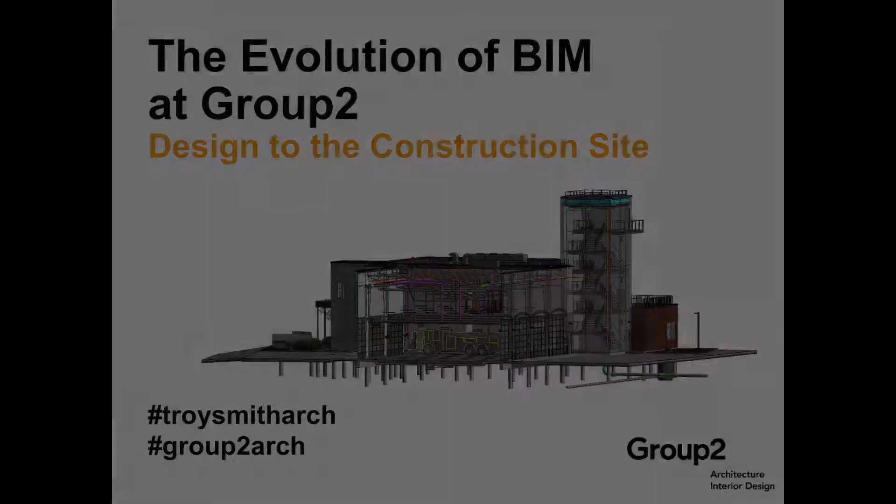So we've evolved like Rory and Grant. We've evolved the title of the presentation a little bit over the last couple of weeks.

So just so everybody understands, Group 2 has offices in Edmonton, Red Deer, and Calgary. As was noted, I was a member of the firm up until 2010, moved back to Saskatchewan to start the Saskatoon studio and became principal in Group 2. We've been in Saskatchewan since 2010, so 7 years. We've evolved the studio from myself and my wife, Laura, up to 10 people now in Saskatoon. I'm going to talk about the evolution of BIM in our office from design to the construction site, because we've found a lot of the power of BIM is not only from the design side, but the integration to construction. The three projects I'll talk about are actually from Alberta, none from Saskatchewan, but they give us a place where we can go, I think, as a province.

So, I mean, we've all been hearing about BIM for many, many years. And when our firm started down the BIM road, we had lots of questions: was this the silver bullet? Was this going to achieve all of the great things we thought it was going to do? How are we going to get there?

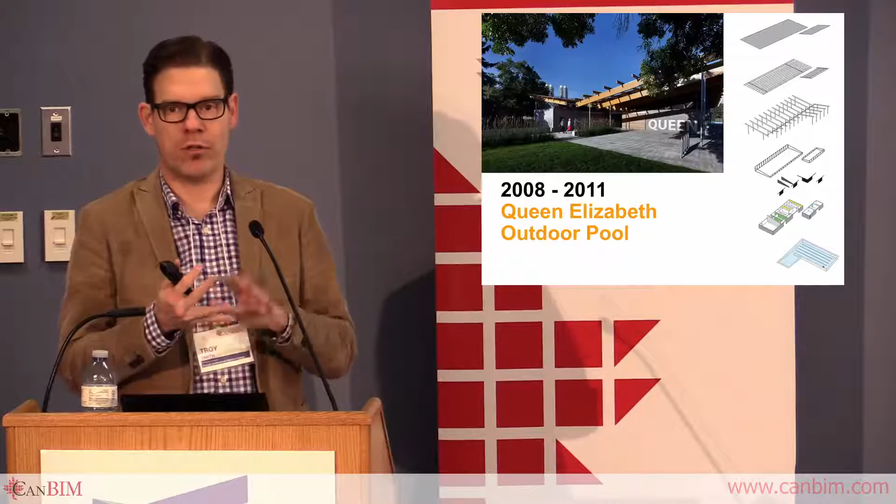So Queen Elizabeth Pool was the first project. Started in 2008, completed in 2011. We thought it was a good project because it wasn't very big, a $1 million construction budget. It's also a seasonal building, so really the major parts of the building are architectural, structural, and electrical. There's no mechanical really in the building besides plumbing. So we thought, well, it's a good place to start to get the ball down the field a little bit.

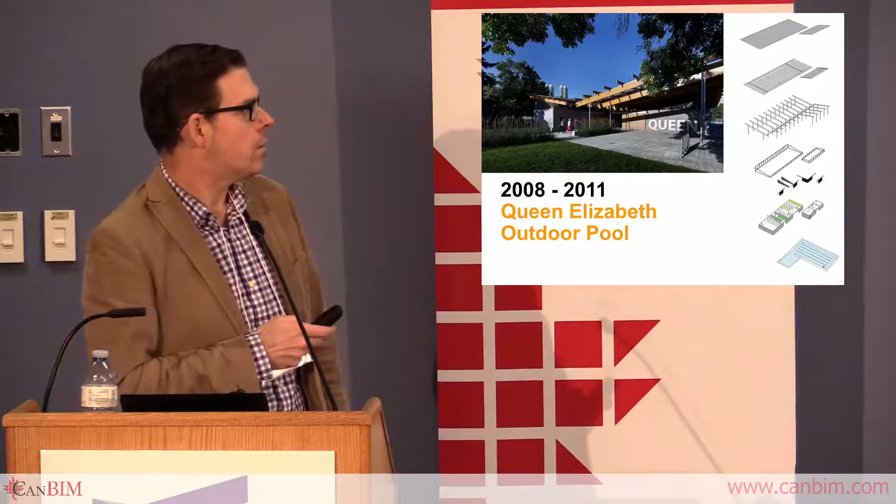So here's a shot of the BIM model. At the time, we as a firm had structural and architectural together - we don't anymore, but at the time we thought, again, super easy. We get architects and structural engineers working together in the same model, no problem. Pretty easy to kind of get the ball down the field.

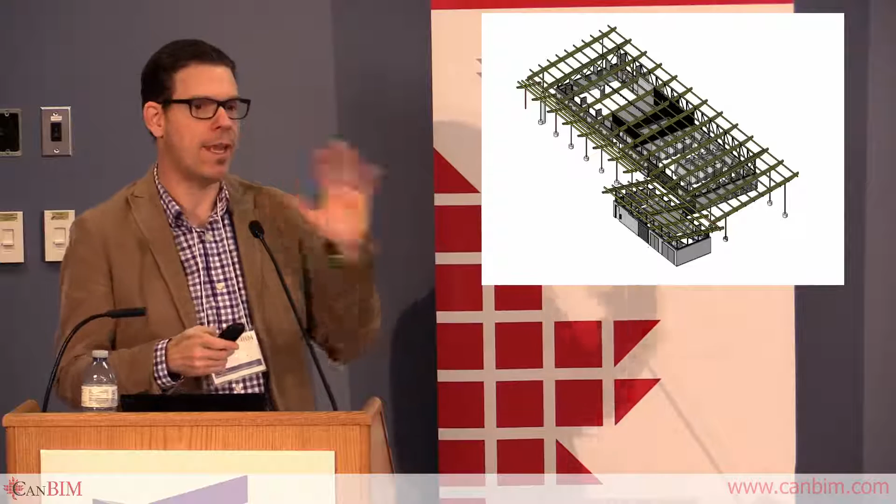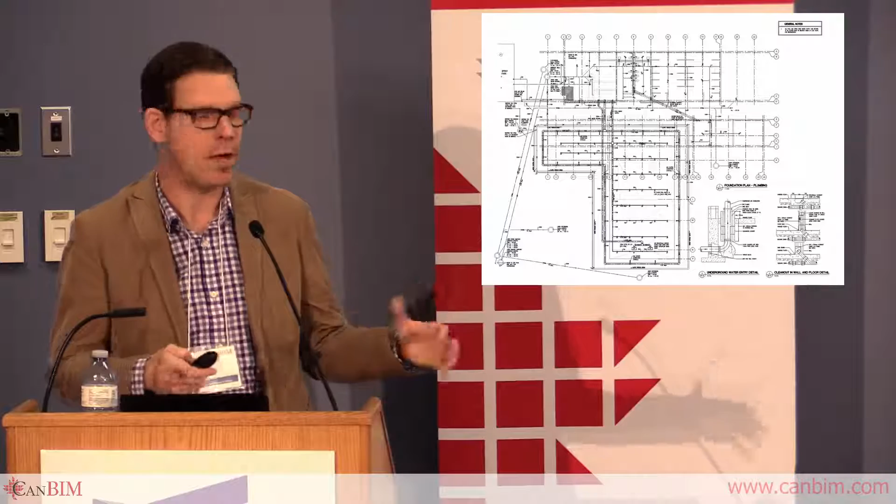But the difficulty we had is that our mechanical engineer, when it came to the pool, the kind of L-shaped thing on the bottom, none of that is drawn three-dimensionally. Everything is drawn two-dimensionally. So we had to try and coordinate all of the three-dimensional objects that we had with the two-dimensional objects that they created for the pool. So that whole piece, the efficiencies that we see now using Revit, wasn't really there. It wasn't really there because we started as a test case, so how we could use Revit.

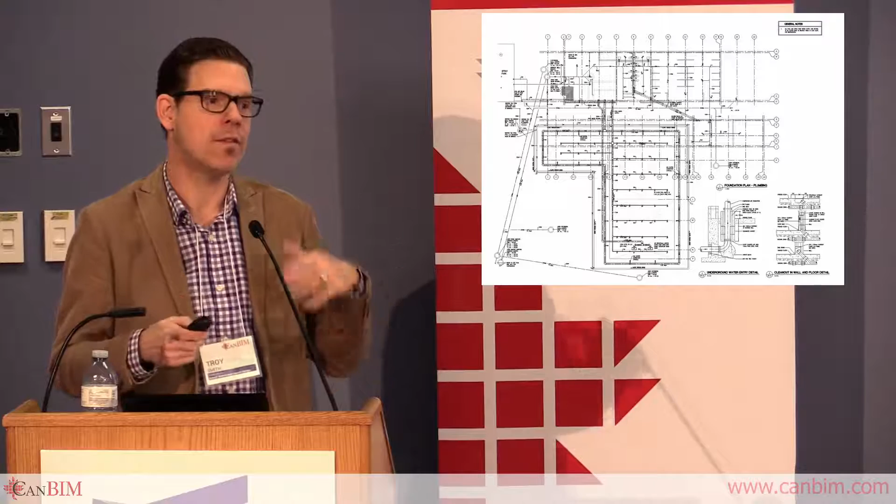So I'm going to talk on the three projects about sort of lessons we learned using Revit and where we have evolved things over the years. So as I said, the first part was this 2D and 3D coordination piece. More and more, we are trying to do everything in Revit and doing it three-dimensionally, even trying to get our landscape architects to do things three-dimensionally, which is really, really hard. They don't like to draw things three-dimensionally, generally speaking.

So as much as we can do that, we coordinate those pieces together to really make them work. All building consultants using Revit - we've now mandated as a firm on, I would say, 90% of our jobs, we don't allow our consultants to use AutoCAD because the efficiencies are just not there. This was the first project where we really understood that's required. The other thing is the architectural site plan. For the longest time, we've been drawing site plans in AutoCAD and then merging them together with the Revit world. In the Saskatoon studio, we've now stopped drawing all site plans in AutoCAD. Everything's done in Revit, so we can coordinate those things much, much better.

So what happened there? Oh, there's a slide missing. Okay, sorry, the next project is the Meadows Community Recreation Centre in Edmonton. We started it in 2010, it was built in 2014 by PCL. Very, very large team - we had consultants from Edmonton, Red Deer, Saskatoon, Toronto, Calgary, and Wisconsin on the job.

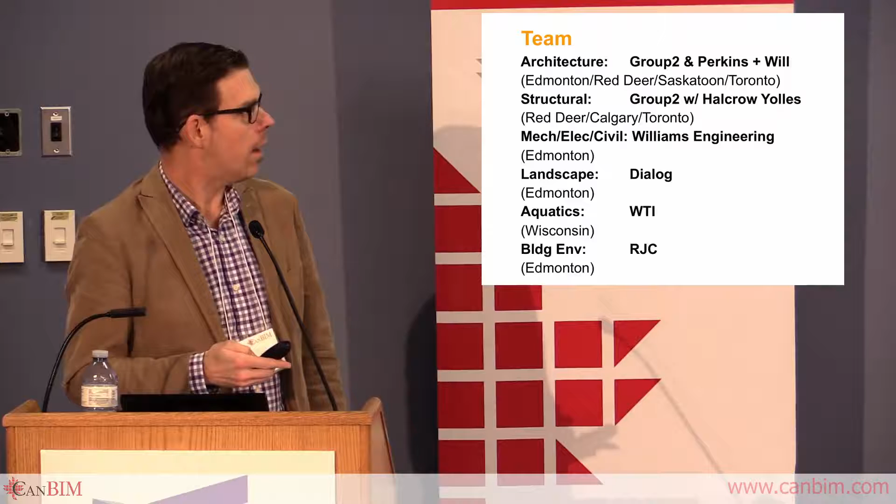So we tried to figure out the best way to break up the model to make it efficient. What we ended up doing was an integrated model between Group 2 Architectural, Group 2 Structural, and Williams Engineering, our M&E consultants. Then we had federated models, linked-in models for Perkins & Will, another architectural firm, our pool consultant, and Halcrow Yolles, the structural consultants. So we essentially had 4 models coming together, with one model that was really, really big because it had M&E, structural, and architectural in it.

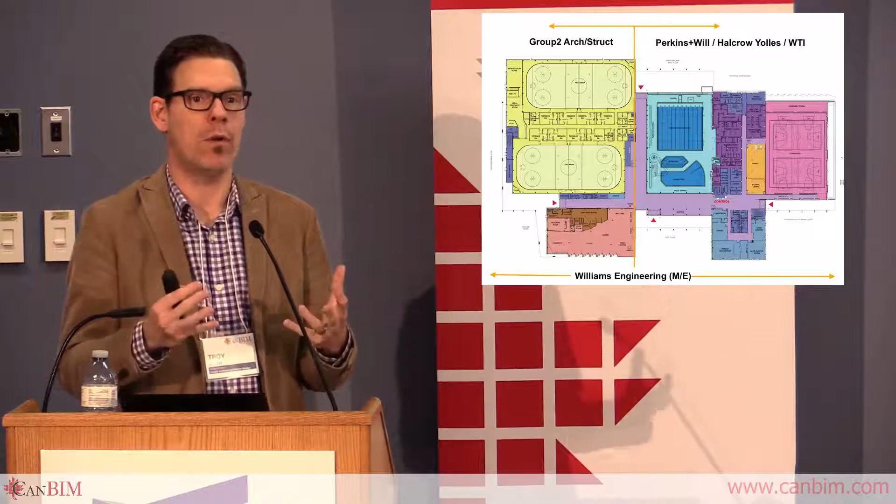So just trying to get, we actually had to develop a schedule so that people could actually, when they would save and sync the model, they couldn't do it at the same time because they would crash the model. This is back before cloud was being done. We had a Riverbed appliance to compress the information going back and forth between different consultants to make it work, but we still had to create an actual saving schedule so that we could make it all work. So there was a lesson learned right there.

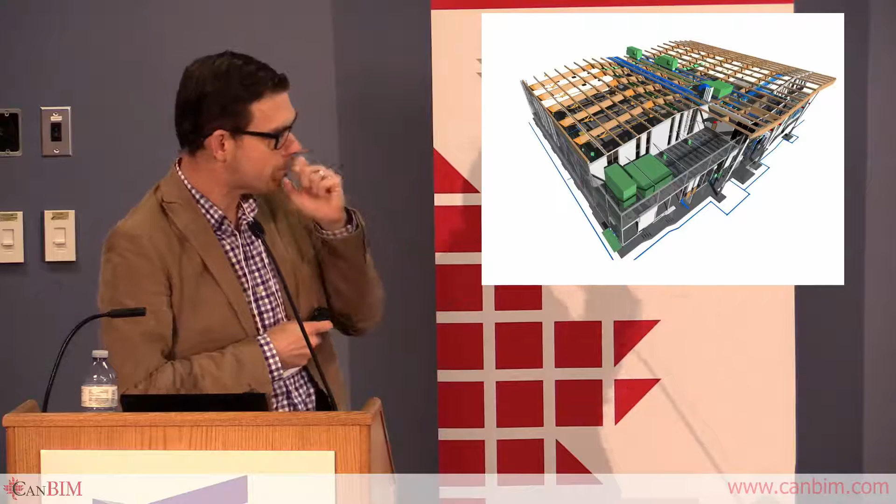The other thing, as has been noted several times before, the biggest piece we've seen is the coordination of all the elements. This is a shot from Navisworks, our Navisworks model. All of the green is mechanical pieces, rooftop units, those sorts of things. That was where we found the power, especially because this building has really no ceilings. Everything is exposed - lots of exposed piping, exposed ductwork, all those sorts of things. So if you're going to build that, you need to coordinate it.

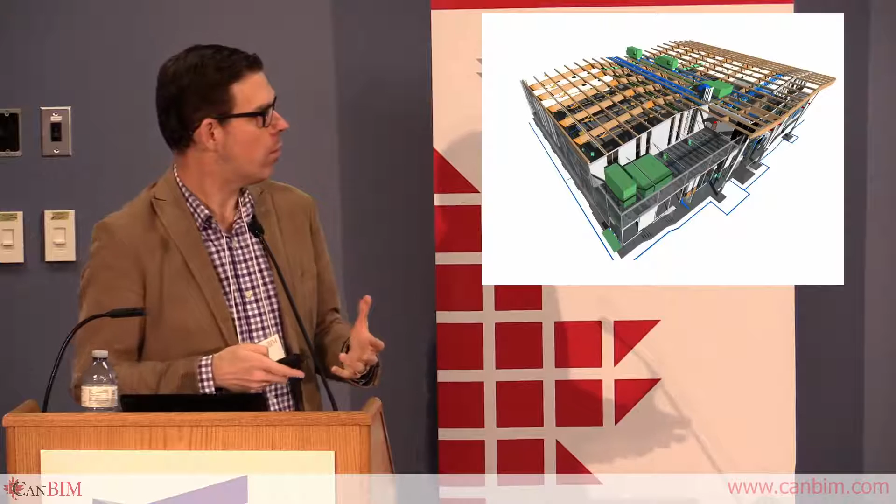So we spent a lot of time marking up things where we had to move the piping, relocate piping so it would go under beams and under ductwork, because none of it's hidden by the ceiling - all of it's exposed. It's got to be done right.

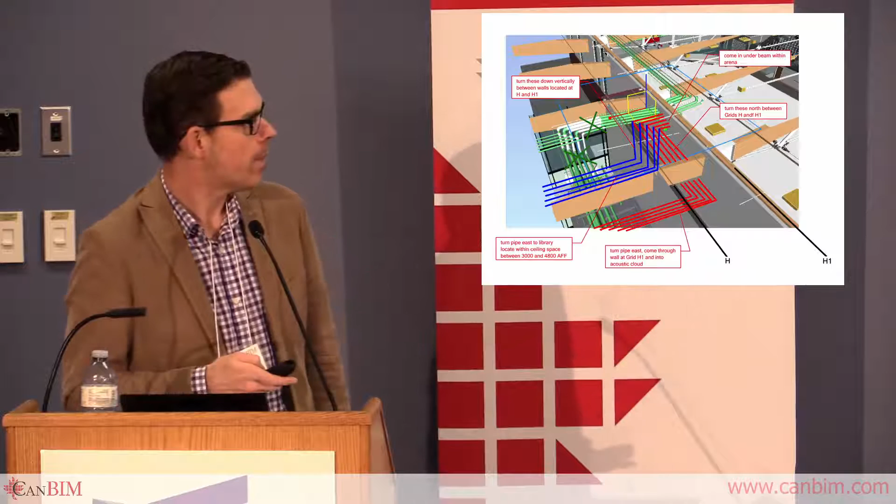We also spent a minimal amount of time - this was our first job where we actually did true clash detection. We did it, I would say, sort of near the end of the job, which was probably, again, lesson learned, not the right time to do it. It was a bit of a test case on doing true clash detection. It gave us a bit of a starting point. Did it fully pay out for us at the time? No, but what it did help us learn was that we needed to do it earlier on in the process to create true clash detection going forward.

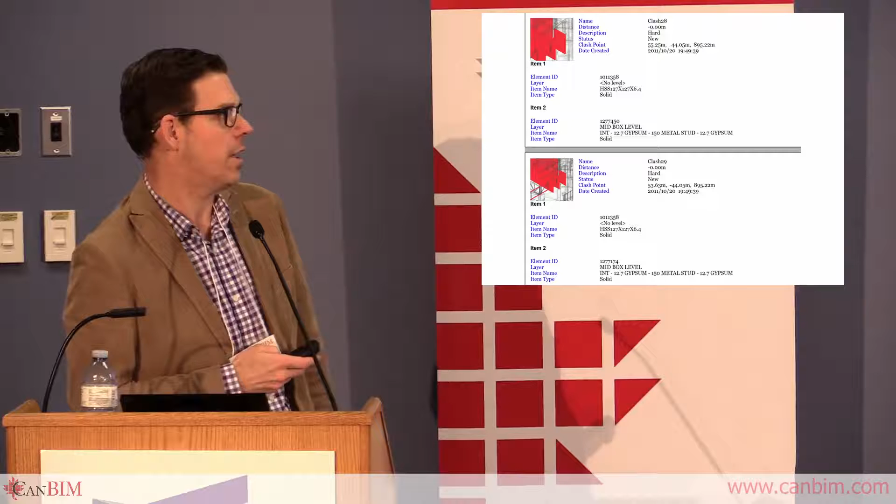So as I said, lessons learned: integrated model, size and speed. The other thing we had, our BIM execution plan, was very simple. We constantly were getting the consultants to make sure they were executing the project as described in the BIM execution plan. Because it was one of the first times a lot of them had done BIM on this scale, they were having a little bit of trouble knowing when they had to have certain things in the model, when they didn't - at a 50% working drawing stage, what needs to be in at this point and what needs to come later. So we spent a lot of time working with them to understand what needs to go in at that point.

Again, clash detection was a big one. The other one was that we provided the Navisworks model to PCL, the general contractor, to try and help with visualization of the project. But what ended up happening was, good or bad, PCL started using that model more to help them understand things. Then all of a sudden, a whole bunch of questions started coming from the model. But the model was never intended as a model that could be truly used for construction.

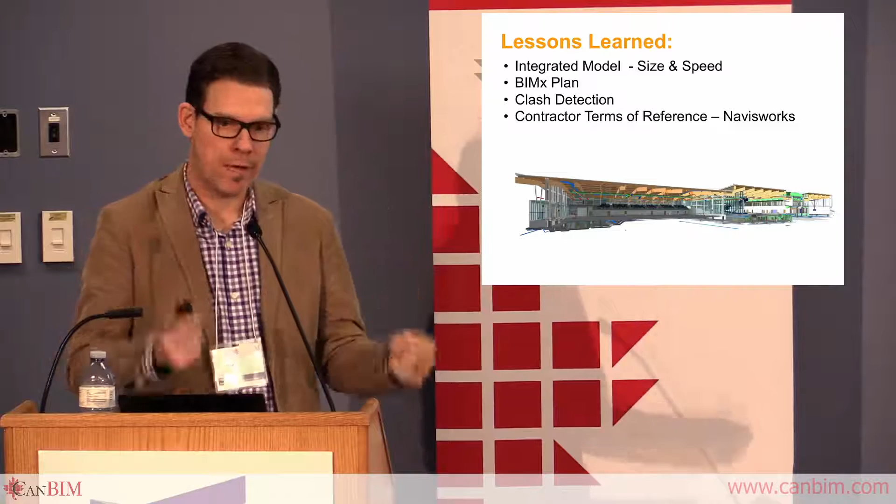At the end of the day, this was an export to 2D drawings to provide a set of tender documents where you could tender the project and build the project from. So that's another piece that we learned a lot about. We have to make sure we're very clear with our terms of reference when we're handing over models to the general contractor, so that it's very clear what that model's intent is, so that we don't get questions coming about it later.

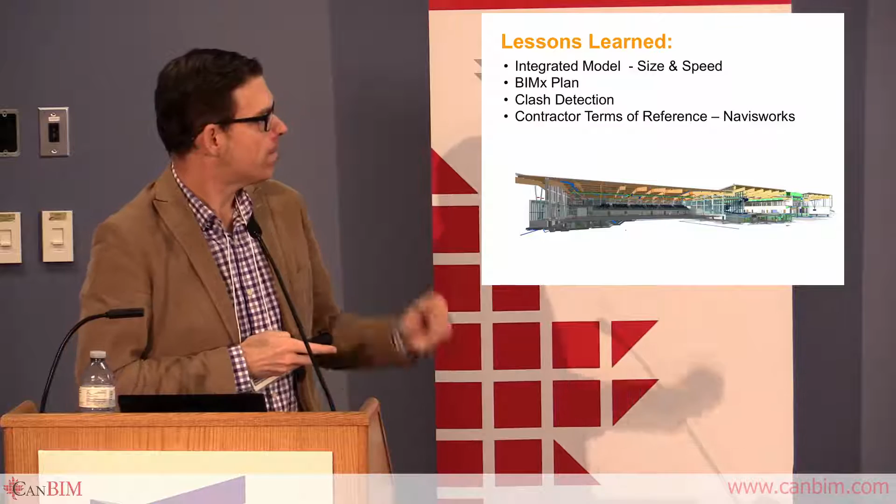So the last project I'm going to talk about is one we completed recently, in 2016, St. Joseph's High School in Red Deer. I'm glad Rory gave an IPD primer earlier, because I won't have to expand on that too much, which is nice.

We were contracted by Red Deer Catholic Schools to deliver 2 schools, both under an IPD contract. One difference between this and Moose Jaw was that we had 14 signatories to the contract, compared to Moose Jaw's 6. A lot of our major subtrades were actually signatories, so the contract is with the owner, the consulting team, the general contractor, and some of the major subtrades.

Here it's 14 signatories. On some projects we're doing right now in Alberta, like the Red Deer fire halls, we've had 22 signatories to the contract. So everybody is tied together through the contract, and the power of that is everybody really has to pull in the same direction because we're all contracted together. No one is off in left field where you can point fingers, because they're not part of the team — everybody's part of the team.

So we find this is one way that, leveraging BIM on that front, we can really get far down the field with constructability in BIM and cost saving.

The total project budget at the time of validation was $51.1 million. Delivering the 2 high schools, we actually came in at $47.8 million — $3 million under budget — and gave the owner way more than they had originally wanted. They added several things through the process, like furniture and commercial kitchen equipment, a whole bunch of things, because they had extra money due to the efficiency of the process. I'll talk about that a little bit.

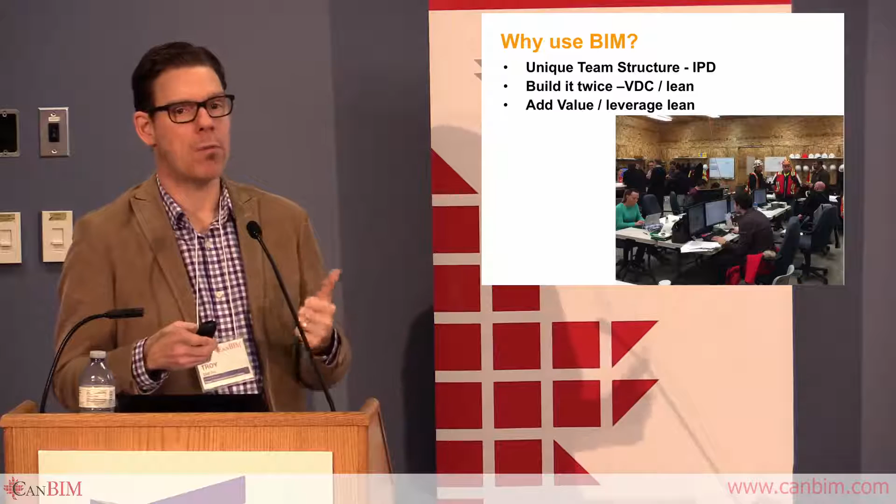The tools we used on these projects were Revit, Autodesk 360, Navisworks, AutoCAD. We used Trimble quite a bit for surveying, because day-to-day with the general contractor there was constant surveying so we could keep an up-to-date as-built model as we went through the process.

We co-located on-site. One key thing we did on the first school was build a big shop, so to speak, that became the site office — our big room — but also became an amenity for the school once it was done. It provided a great place, so you don't have to rent trailers. We were able to co-locate subtrades, engineers, architects, the contractor, and the client, everybody in one place many days of the week to make sure we were all on the same page.

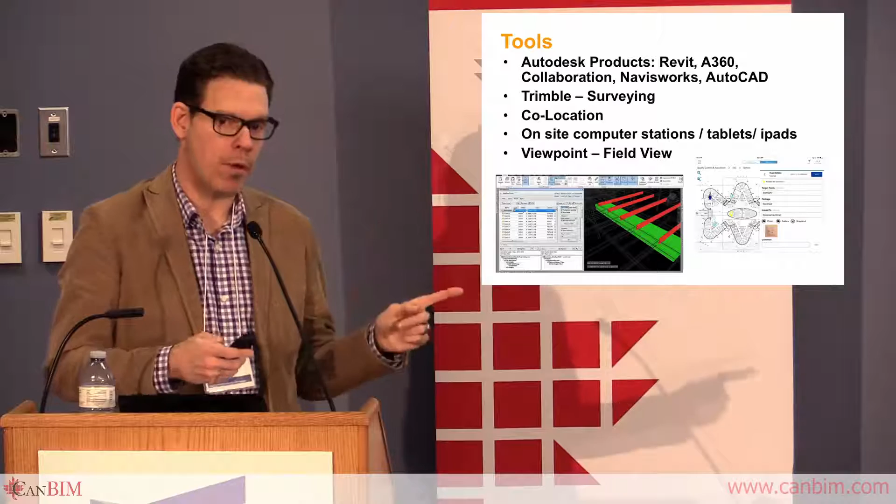On-site we had computer stations, tablets, iPads — a lot of the trades were given iPads to use virtually on site to look at different things. We had pretty good uptake on that front. Some trades were a little hesitant, but there were no drawings for this job — everything was built from the model or from other models added to that model. Not a single drawing was added.

Interestingly, we didn't even do a submission to the City of Red Deer using a drawing. We actually brought them to the job site, ran them through the model, and walked around the site with them to look at specific things.

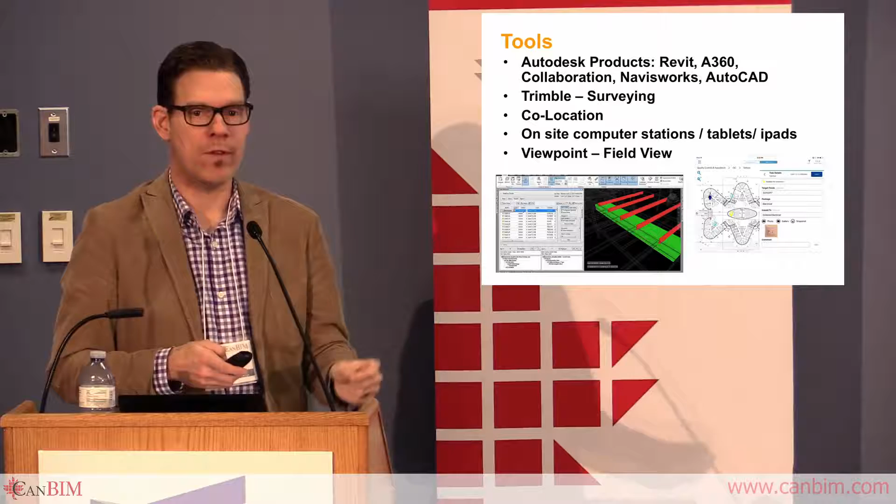So they didn't actually approve us for a building permit with physical drawings, which is relatively unheard of.

So the process again uses modeling and design, and on through construction. To Roy's point, I think as architects we're really good at using modeling for design, but the question is always, how does it go into construction? Because honestly, that's where we're all going to find savings in this industry, to leverage it better for the owner, to help them understand what they're getting, but also to make sure their project hits the budget, it's on time, all those sorts of things. That's where we can provide true gains.

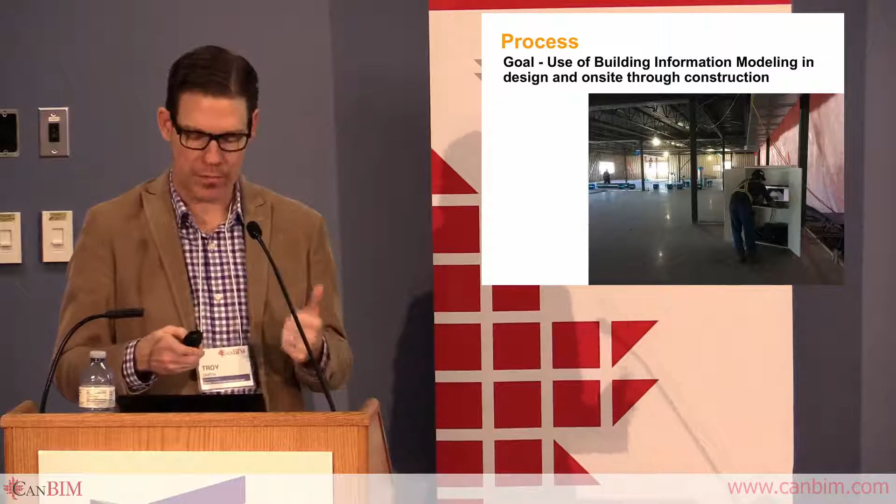But we asked lots of questions to the contractors, like what do you need from the model? Because one of the things I think we're good at as an industry is we want to model everything. It's actually not efficient to model everything. There's certain things you don't need to model, i.e. we spend lots of time as an industry detailing millwork out. We don't need to detail millwork out. The millworkers know how to build it.

We got to provide them with a spec. We can probably do a lot of it through 2D drawings. That's the best way to get millwork done, instead of us spending a whole whack of time detailing and detailing and detailing for no apparent reason. And then handing it off, like what do they need when we hand it off to them? And then what's that output?

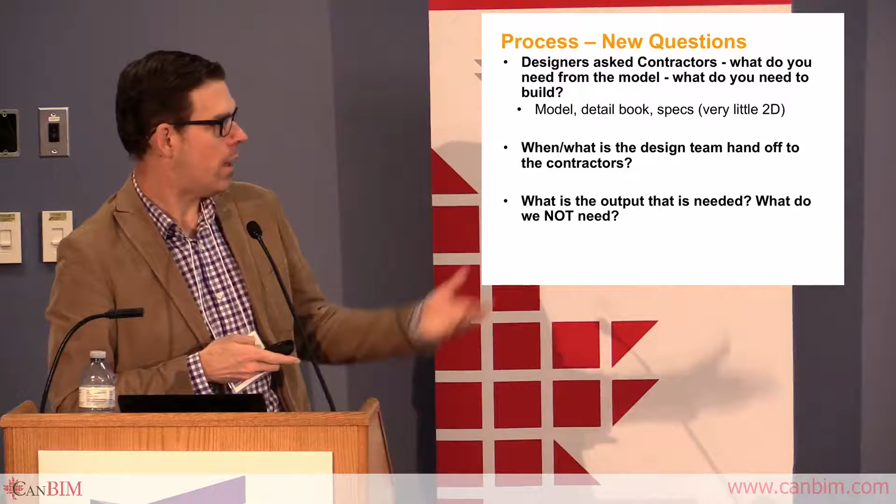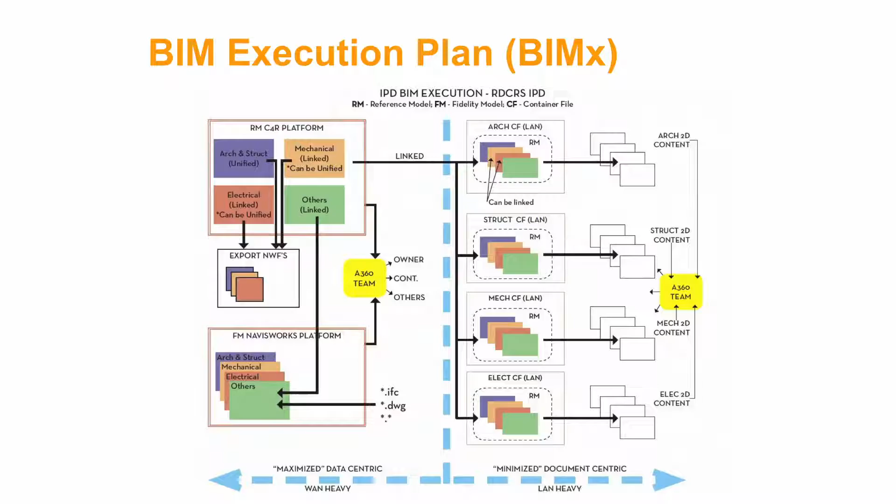So I'm not going to go into too much detail here, but we had a very robust BIM execution plan at the beginning, and to the dashed lines on the bottom, we had to talk about items that were very data-centric, very heavy from a size perspective, against things that were very light, 2D versus 3D, and how we integrated those pieces together using things like A360, and then exporting certain things to Navisworks, all that kind of stuff. But we spent a lot of time on this, and then working with the general contractor and the trades to help them understand how that was all going to work together.

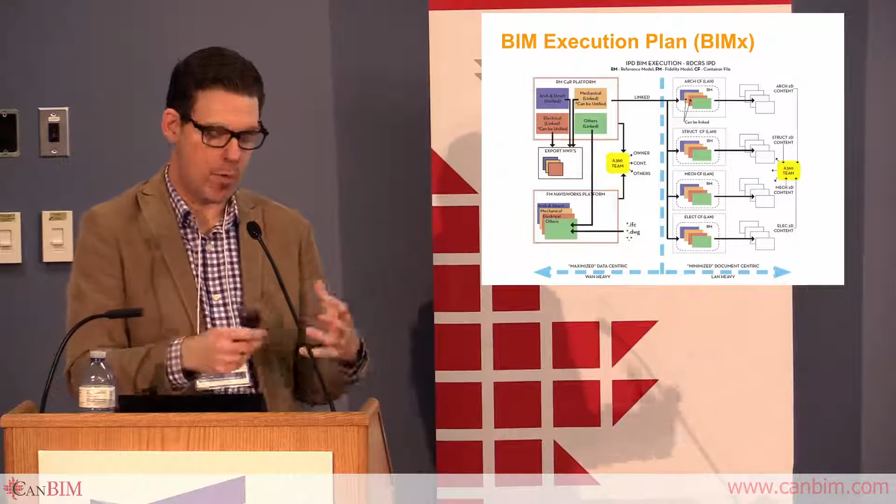Every project we have to talk about level of development, and this project was no different, because I think we actually spent a lot less time building things to a really high level of development, and building things to a lower level of development, and then allowing the trades to build it to that higher level of development through their fabrication models. So we would provide them essentially with a framework at maybe an LOD 200, LOD 300, but then when it comes to fabrication, they would take it and produce something that was maybe LOD 350 or even further, because that's where the power is. There's no point spending a whole whack of time getting things to a certain level and then having a subtrade go back and take it and rebuild it again. How do we make an efficiency in the process?

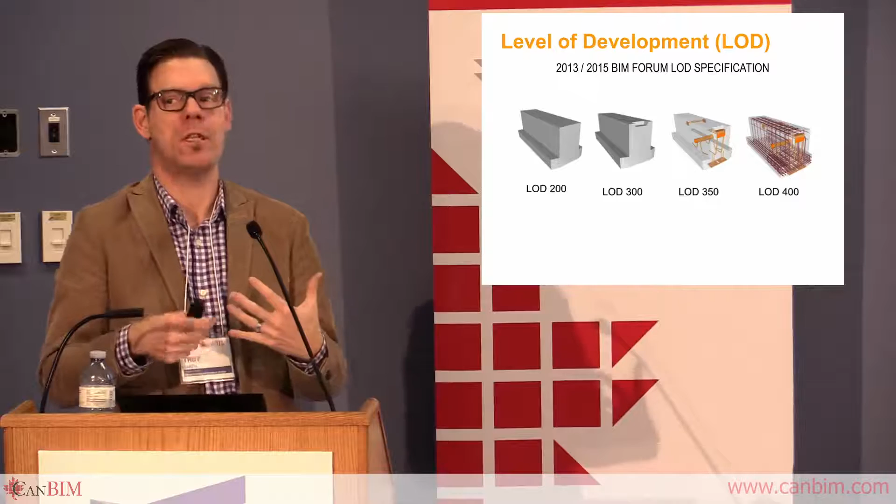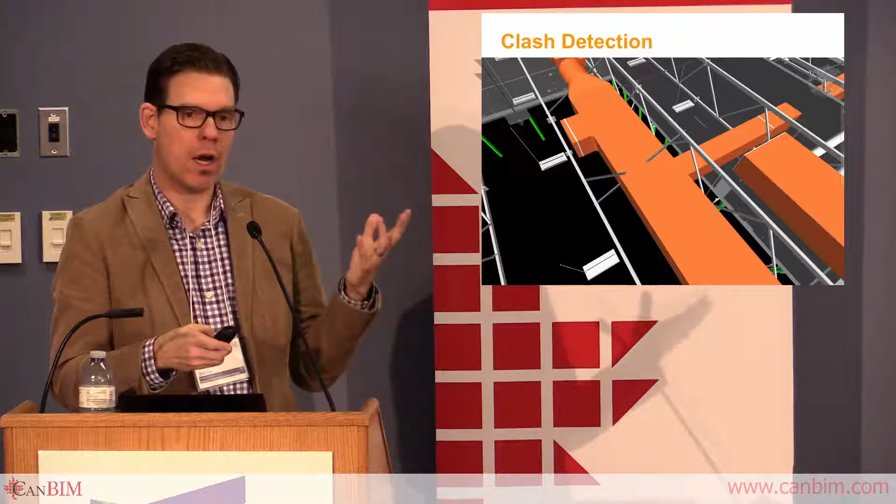Again, clash detection, I mean this is like a Revit BIM buzzword. We spent a lot of time doing clash detection, and that's the great thing about integrating with the general contractor on the job site, major subtrades, all those sorts of things, sitting down, going over the model with everybody to talk about clash detection and resolve the clashes before we get to the job site.

And then precision layout. We spent a lot of time surveying. The surveyors on the job, we had one specific guy on this, our project was with Chandos Construction, who basically every single day was just shooting survey points so that we could ensure our model was up to date. We had an up-to-date as-built model that was always, every day on the job site, today's model. We tried to eliminate the whole idea that, oh, that's been changed, but we never got it updated in the model. It was very, very precise.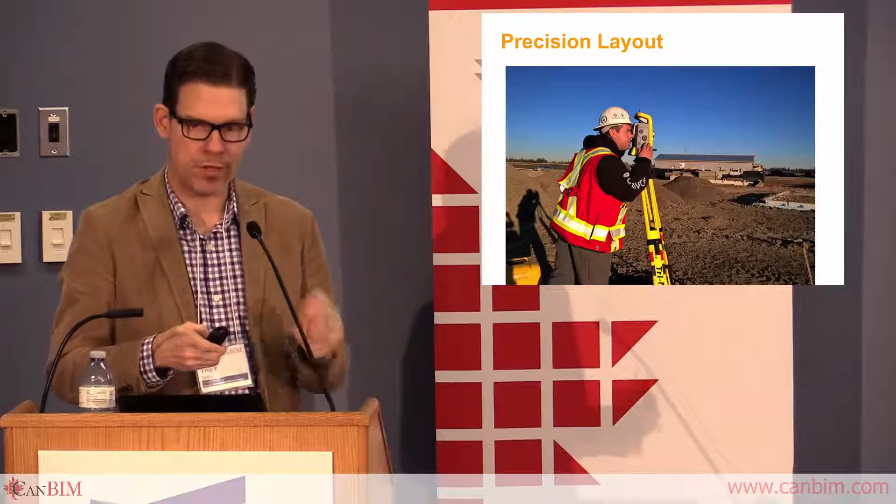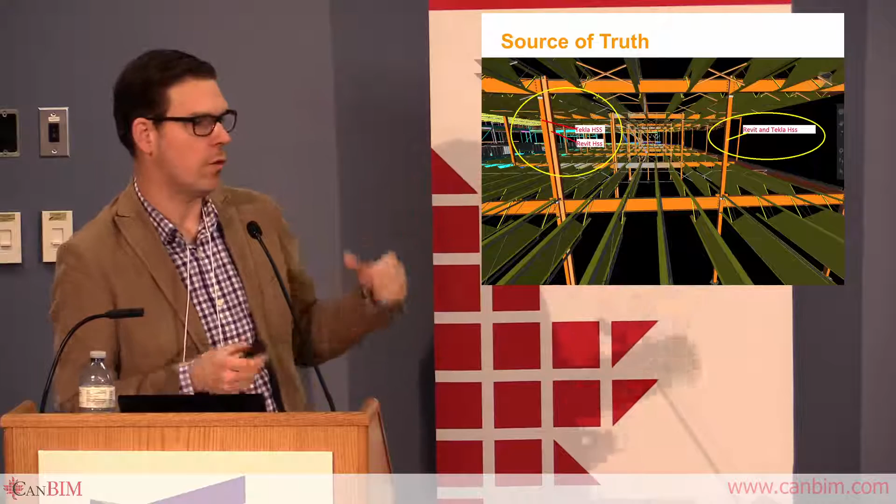One of the terms we've used through the process is called source of truth, and you can sort of see it here. This is an amalgamation of our Revit model and then the Tekla model from the steel fabricator, and some things had to move because of just constructability, those sorts of things. But the question is always, again, back to the surveying, which is the source of truth. At the end of the day, the typical project, it's going to show the Revit HSS here, but then the Tekla model or the shop drawings are going to show the HSS here. So we were constantly updating that model to make sure we had the latest information, overlaying different models to make sure the information was correct.

One of the things I've heard a lot about is how we can do things efficiently, and we totally can. But at the end of the day, good information in equals good information out, or crappy information in equals crappy information out.

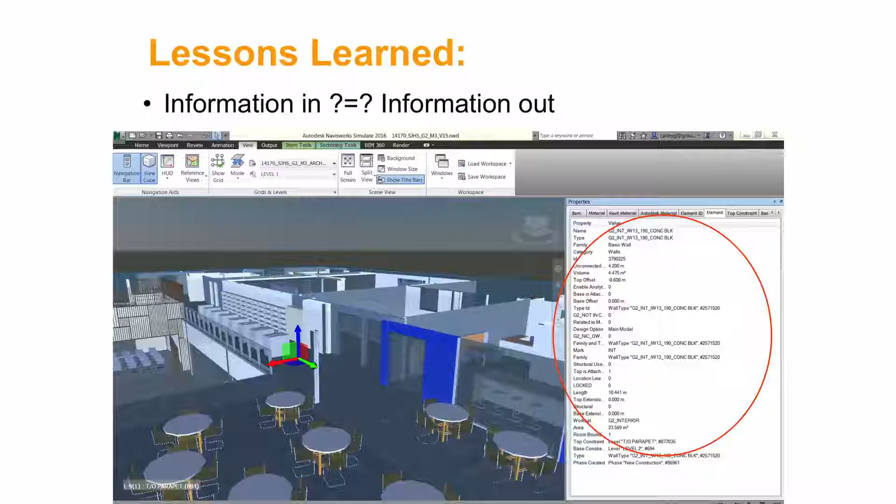You've got to build it right at the beginning, and you've got to know what you're building it for. If you look at the naming conventions and the pieces in there for a wall type, we didn't need any of that stuff, but it created confusion within the model.

So we had to find a way to simplify certain things we were doing to make sure that information that goes in was going to be helpful and work for the subtrades when it got to the job site.

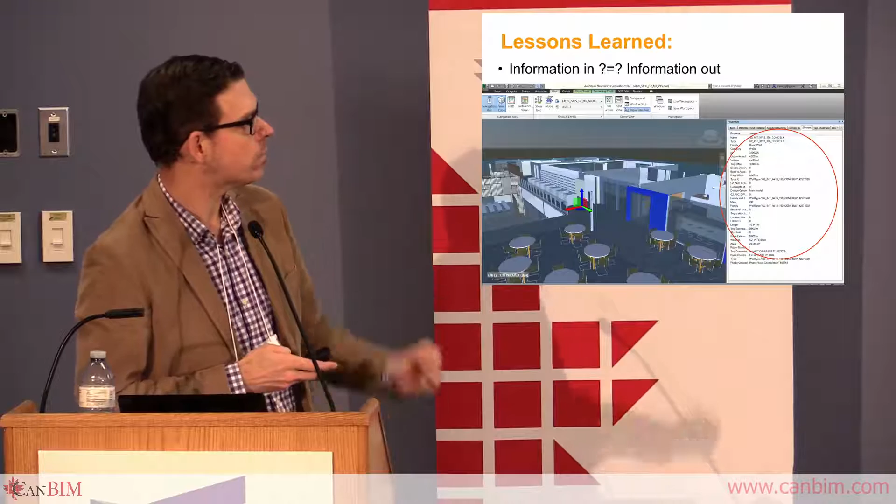Lessons learned on this project are huge because of the integration to construction, and the elimination of rework. One of the big ones was pre-cut steel studs. We had the steel stud guys create packages of steel studs for just-in-time delivery. They would be pre-cut, arrive at the job site, and they knew where they were installing that day.

The only place it became maybe an issue was around windows and doors, but even then we got to the point of knowing exactly how long those studs had to be at those locations, so they could be packaged for just-in-time delivery, like the car industry, and brought to the job site when needed.

A huge efficiency there from their perspective, because they don't have to cut - all they're doing is installing. It makes a huge difference in the construction cost and the speed of construction.

Co-location - we always think about project managers, architects and engineers in a big room, but the more we've tried this, the more we've realized it's not just those people, it's also the technologists, the contractor foreman. All of those people need to be in the room together working, not just people overseeing things, but people doing the work.

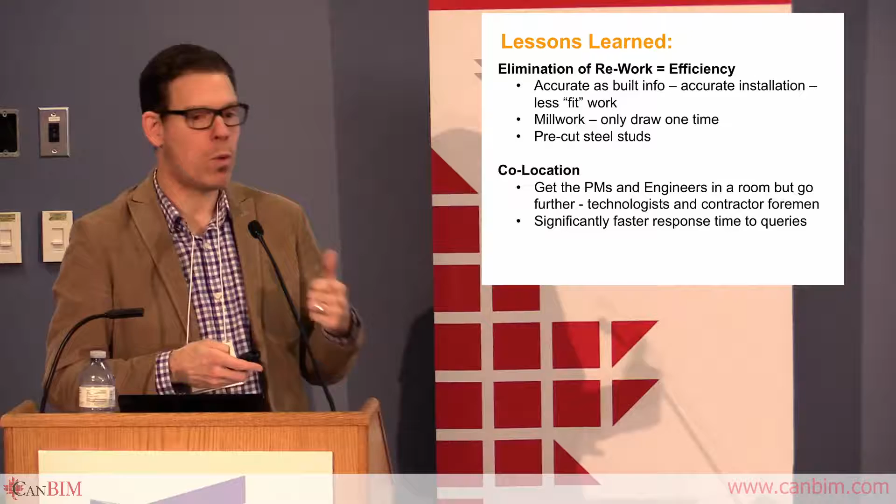That's the critical part to getting this done efficiently, because response times to queries or questions, whatever the case may be, we could almost do instantaneously.

Construction site to production site - that was probably the biggest lesson learned for me, that we can leverage this to make construction efficient. We can build in the computer, then leverage that on the job site. We can do way more prefabrication with this, things like ductwork and all those sorts of things, because of an accurate model when it was all said and done, leveraging the use of BIM to its fullest.

Efficiency honestly saves everybody money. These IPD projects are great because you're all tied into a contract. So at the end of the day, if one group is having difficulties on a job, it's up to everybody else to help them, to bring them up, because when it's all said and done, everybody's profit is at risk. Everyone has profit here, but it's at risk depending on how well the project goes.

So if we can find ways to be efficient through the use of BIM, prefabrication, all those sorts of things, we could all make money, give the owner what they want, give them a project that's ahead of schedule. It's a win-win for everybody.

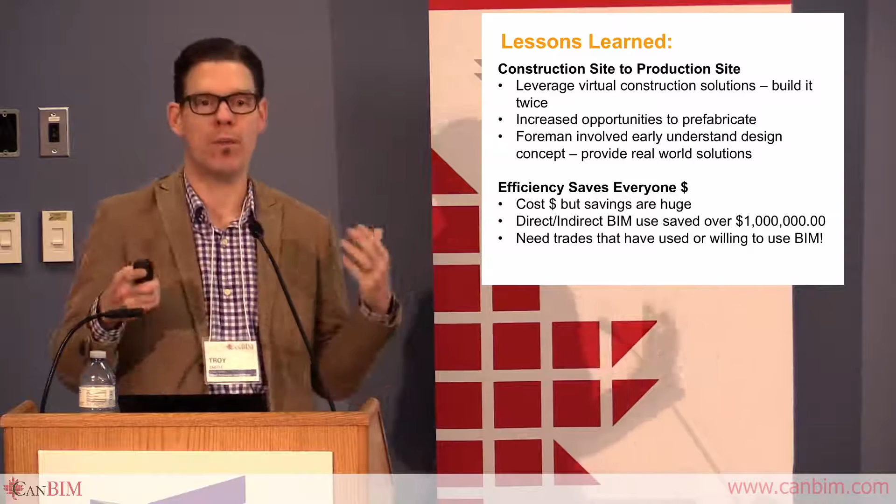So the last slide, lean IPD versus traditional: a $35 million project, $33 million delivered it traditionally. Hopefully you'll get it for 35, you might get it for 40.

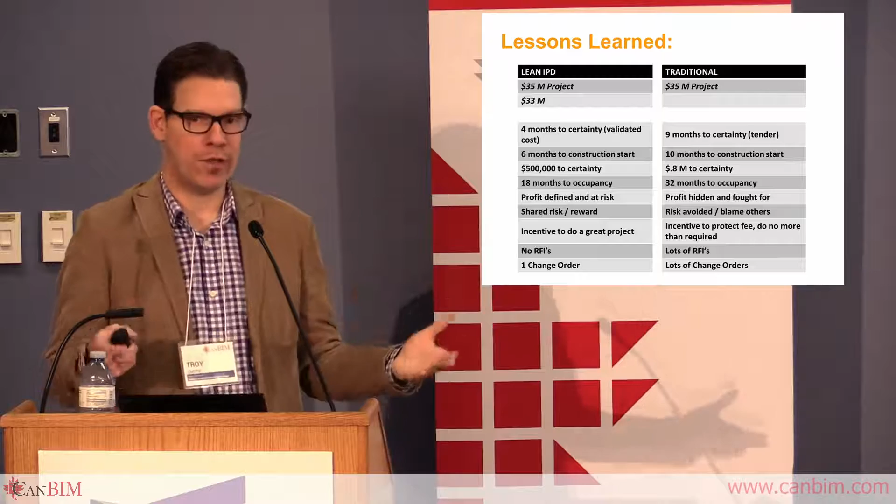On construction schedule, we were able to get from the validation point to construction start in 6 months. It took $500,000 to actually achieve cost certainty, 18 months to occupancy, and profit was defined right at the beginning with shared risk and reward - less finger pointing saying it's your fault, no it's your fault. It's everybody's job to figure out how to do it right, so the risk is really shared by everyone. We had no RFIs and only one single change order on the job, all because of the process and the integration of BIM.